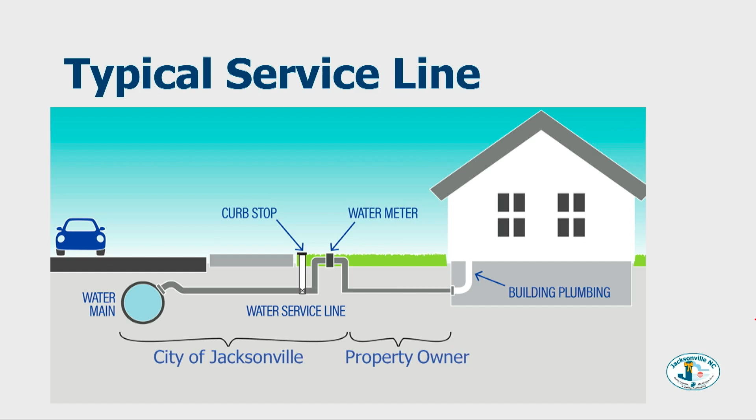Now, with this legislation that's come out, it has been put on the municipalities, or at least the owners of the water system, to check both sides of the line, which is what we've been doing. So moving forward with that.

The lead and copper rule, just going through, those were implemented in '91. We all know that we stopped using lead pipes in '87, 1987. We wanted to reduce the amount of lead exposure throughout water. What causes the lead? It's not so much the lead pipe, it's the degrading of that lead pipe with chemicals and corrosion, and that breaks down the lead, which then introduces it into the water.

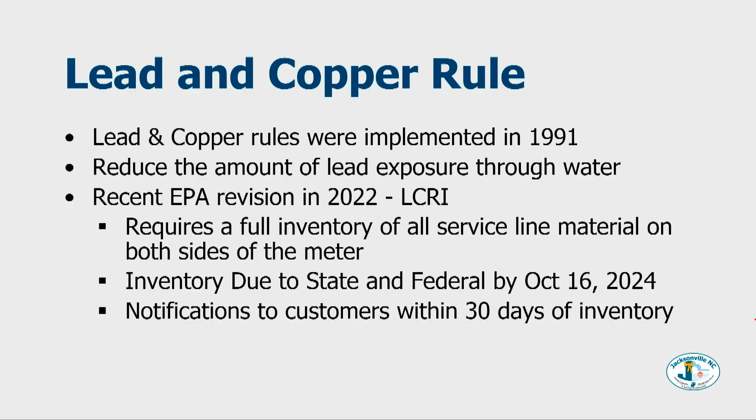A new EPA revision came out in 2022, the lead and copper rule, and they wanted an inventory, the LCRI. So we had to get a full inventory of all service line material on both sides of the meter. The inventory was due to the state by October 16th, 2024. And then we had to put out notifications to residents and customers on the status of their water lines. What did we do?

We implemented a database in 2023, which is accessible through the city website. We have our side that we're looking at, and then we have a resident-facing dashboard for them to track, and they can inquire about their own address and what's going on. We mailed out notices to customers detailing our course of action. We tried to educate them on the lead, copper, and galvanized pipe and what all those things actually mean.

We've done over 12,000 lines that have been identified through either physical inspection or otherwise were known because they were built after a certain time, and we have record of the deed, what lines and materials were used. Or we put it in and we know exactly what's there. We've complied with the inventory and identified the unknown materials that was due. We hit that mark, and once we got there, we were in a pretty good spot because we had no lead service lines discovered at that point.

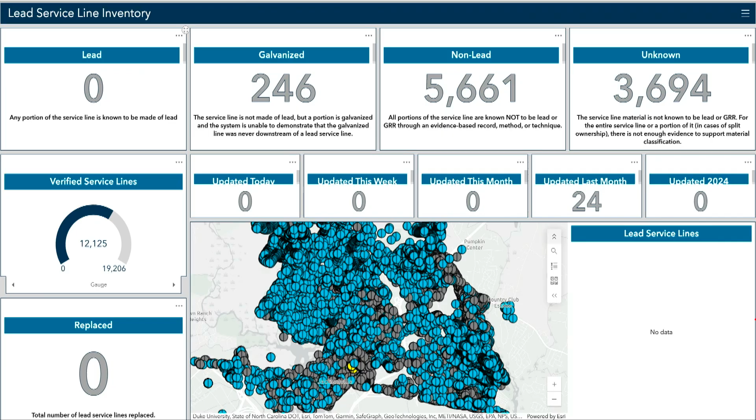But this is where the work went in after we did that. This is just an idea looking at that. This is what the dashboard looks like, and you can see over 12,000 lines verified. You'll see the galvanized, the non-lead, and then the unknowns. And we'll get into what we have to do with the unknowns.

So the unknown material, this is the ticking clock that Wally's talking about. We have to have this identified and reported to the feds and the state by 2027, October 2027.

It takes a lot of heavy lifting to send all the TJ's guys out to go dig up every line and physically inspect it. They've done a lot of that, and they've tried to do those concurrently with projects or other repairs. If they're in there, we're checking the line. If we could rule it out, we're checking the line. We're doing everything we could do to get through these things, and that's how we made the progress that we've made so far.

We have 6,200 lines that remain that require material identification. Challenges with those include adverse locations and depth - we can only dig down so far with our equipment. And also the length, the segment distance from the main - if your scope doesn't go that far, you can't rule it out. So we have to get down to that point.

We have some unknown segments that we can't access because it's so far from the main or our access point, we can't see it. And with some of those, why don't we just dig it up? Well, because they're under hardscape - many layers of concrete - or they could be on commercial property that's privately owned. So then we have to make contact, dig that up, break through everything. It's challenging, and it's a heavy lift.

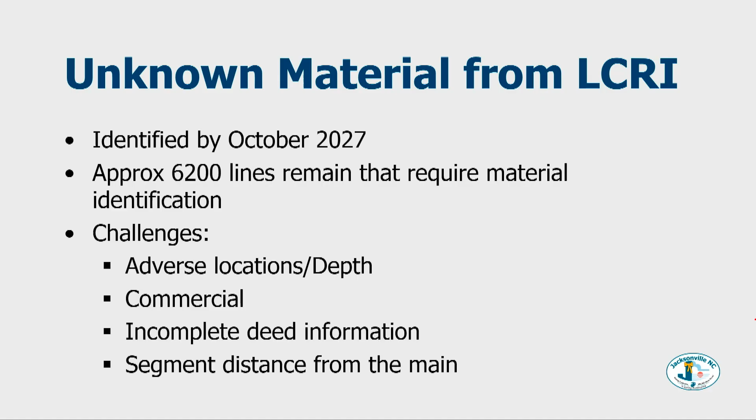With this unknown material, everything that we found that was unknown had to be classified as galvanized requiring replacement, so the unknown material notification went out. If we had somebody that, after October 2024, we had not identified what their line was, notifications went out to those residents so they know what the next steps were and what we're going to do.

The galvanized steel lines that we found, no lead has been found in any of those galvanized lines. Inspections that didn't go all the way to the main triggered the galvanized requiring replacement notice, and all those notices were delivered out, again, with the unknown material notices and all that.

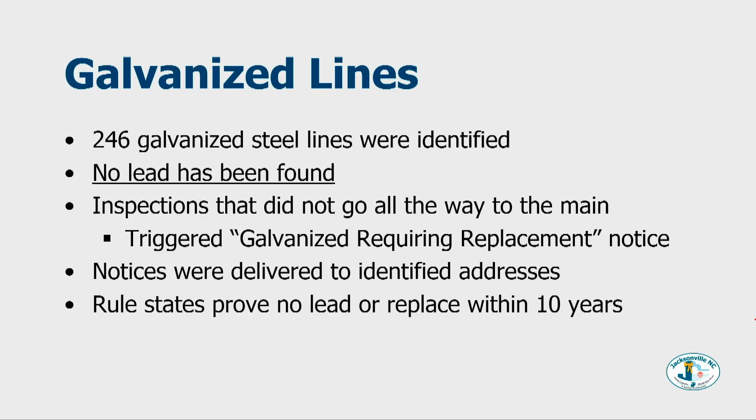Rules say that we have to either prove that there's no lead on the 246 galvanized steel lines that we've seen, or the ones that we can't go all the way to the main on. We either have to prove there's no lead there at some point by 2027, or we have to replace it within 10 years. And that's the galvanized lines.

Replacement of those lines is really one of the big concerns, because the feds have been putting this out in phases. They haven't just given us a clear blueprint from the jump. It's kind of been, alright, you got to do this now. Okay, you got to do this now.

And funding for this is a big concern for everybody. The city of Jacksonville, we're kind of like too big to get help, and too small to get bailed out. So we have to look at grants and things that are in there that we could possibly qualify for in our smaller systems, and hopefully use those to offset costs that we have to deal with replacing pipe that has to be replaced.

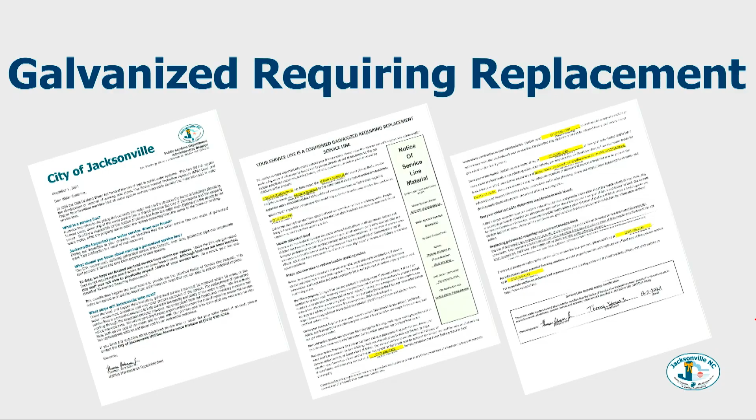And there still has been no guidance on whether or not we're going to have to support the residents in replacing any of their pipe on their side, because obviously we can't just dump that on 76,000 homeowners that may have a problem and be like, hey, you may have to replace your pipe.

And here's the other thing: we may not have found any lead in their service line, but we don't know what's inside the house. So if you have a home in Northwoods or downtown, and you had some sort of repair work done to your service line in the past, that would have updated that material. But whatever the house was built with probably still remains inside the walls.

Is there a year that normally it does it, like 1980s, 1970s? 1987 was the year that we stopped using lead. It was ruled out—you can't use lead in any water systems. It became law in '86, so I think a lot of the industry had kind of tapered off some, but there's still a lot of lead that was limited in size, so you really don't have to worry about anything larger than 2 inch. So you're really talking about things smaller than 2 inch, which is why they say service lines. And there's a lot of service lines where they used...

Galvanized, and galvanized can have lead fittings—lead soldered fittings. Or they may have used some sort of plastic or something in the yard, but inside the house itself, especially some of those built in the 50s and 60s, they may have had lead or copper plumbing. And that becomes an issue for the homeowner, because the challenge with copper, which you can still use today, is if you have lead that's leached into the water, the copper will absorb it and hold it and release it.

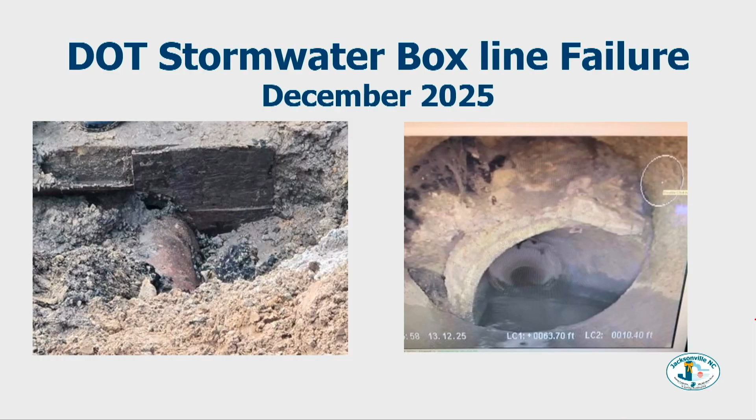So TJ's guys got in there. They worked 72 hours straight over the weekend. I think they found it on a Friday. It was freezing and raining, and they were out there 72 hours straight to isolate that leak and clean up the sewage that infiltrated the stormwater line, clean that outfall, and we had to report to the state, we had to report the spill, all the stuff.

The biggest problem is that the lines we're talking about that come off, and I'll go through this and jump around, but those lines are 50 years old. It's hard to think that 1972 was 50 something years ago, but it was. Those lines are old, and when the state came in, DOT came in and built the bypass, they didn't move our lines. They just put their stuff on top of our stuff and 30 feet down. So we couldn't get to it.

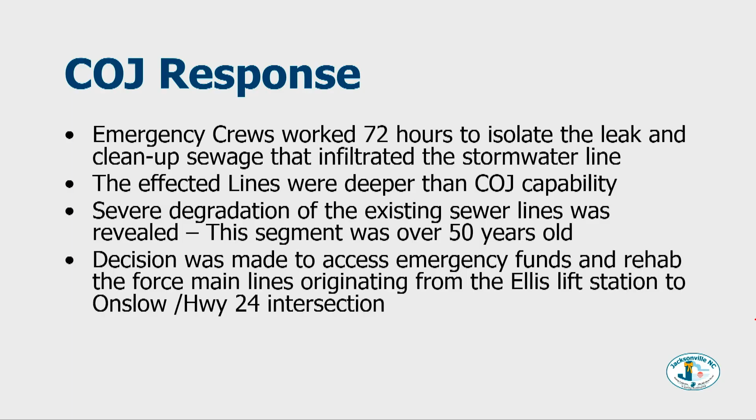So that was a big issue. We had to call in emergency contractors to get in there, just to close it off and find exactly what was going on. Now our guys, TJ's team was on it. They were watching the meters, seeing the pressure problems. They knew there was an issue, and they were quick to get on it. Straight through the weekend, freezing rain, shutting it down, they got that leak turned off so we could avoid an NOV and fines and everything else.

Again, those lines were deeper than our capability. We really stop at like 5 feet, we don't dig past 5 feet for multiple reasons. Once we get over that, we have to step down and bank to get down to it, but that hole would have gotten massive, and you'll see why in a little bit. As we got into that, we saw a severe degradation of the existing sewer lines as we got in, and we were checking this, and you got to clean these lines, and camera the line and everything else.

We knew those lines had to be replaced. They were already in the CIP to get done because we had already done the portion in front of Beirut Memorial where we lined that, and we knew we had to keep going. But this is force main, so that's always a bigger issue. We got in there, saw it was bad, and the decision was made to access emergency funds and rehab the force main lines originating from the Ellis Lift Station all the way to the Onslow Highway 24 intersection.

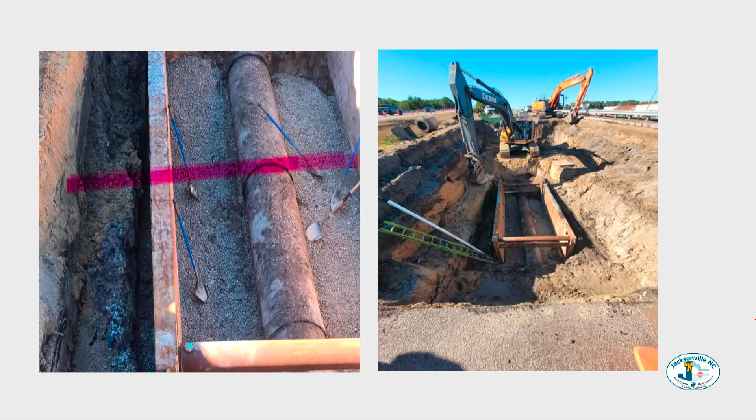That's a picture of the hole to get down to that sewer line. You can look at the size of those excavators and just see how far down that went. Some of you all saw it driving by throughout Christmas. That's a long way down.

Remember, that wasn't always there. We used to have Lejeune Boulevard, but that just kind of built up and built up as they put the bypass in, and these lines were in there. So we had to get to them and get them changed out. So we got this fixed. The contractors came in, working side by side with TJ's crew, and they got this thing closed up.

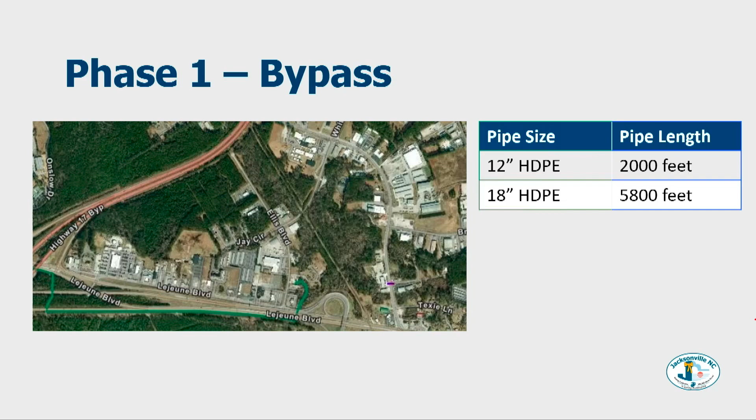The next thing we had to do to rehab these lines, after we figured out we're going to access emergency funds to get this done, you can see the bypass line there. 7,800 feet of bypass line had to be laid down before we could even begin. So we had to bypass the force main from Ellis Pump Station all the way down to tie back in to go through the next basin down to the main pump station. That took a lot of work, as you can imagine.

There's an idea of what that line looks like. 12-inch and 18-inch line going across has to be fused together, and it's a special kind of process, I want to call it welding because I'm a welder, but it's a fusion that they do. They fuse these lines together and have to bracket them together and then pressure test them.

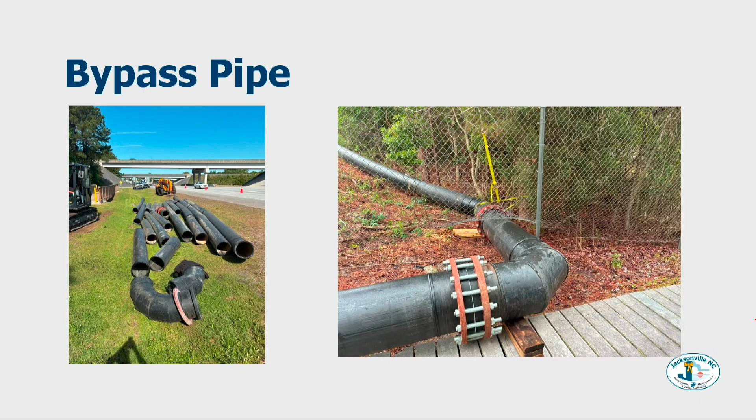We have to flush these lines. Once they get it all up and routed through and out of the way, they're going through stormwater lines and under the highway, anything they can do to not disrupt traffic, because these were going to be in place for quite some time.

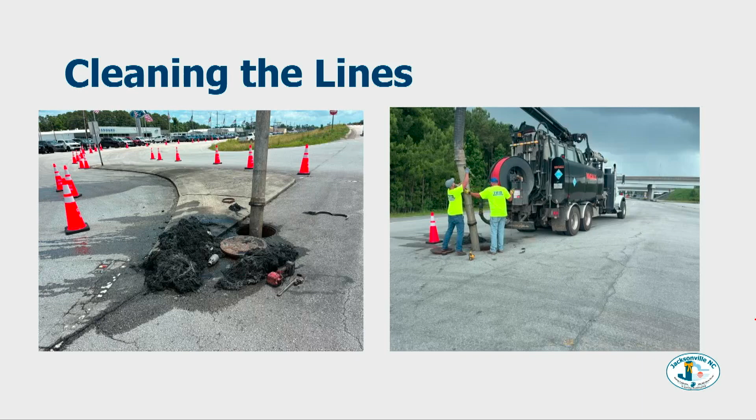So they pushed through. After we did that and got the lines bypassed and shut down the force main coming out of Ellis Pump Station, the boys had to go through and clean the lines. There they are with the sucker truck and the jet truck making things happen. You can see just some of the stuff coming out of there, all that debris built up over years and years that gets hung up.

As we went through, we found 40 tons of debris that was removed just from the lines. That included rags, one entire manhole cover, pieces of the reinforced concrete pipe, RCP, that had been degraded and broken down. Sometimes we brought it to you before where we had cameraed some lines and it kind of looks like a sunken ship. You can just see the skeleton of the reinforcement.

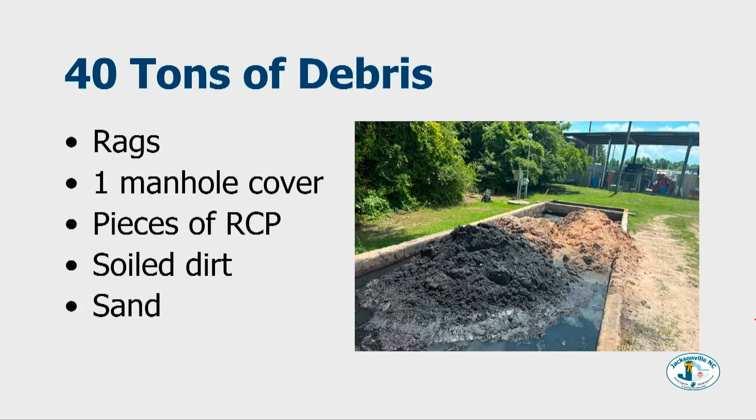So all that concrete had fallen down, large chunks of it that they pulled out as they flushed these lines and just sucked it all out. A ton of soil and dirt, as you can see, that black dirt, that's oil, that's sewage, that's all those things that are in there. It just clumped up and built up in spots. And then, of course, sand, all from the dirt and the sand comes from that I&I that we talk about so much.

So 40 tons, and our crews pretty much did most of that with the help of some contracting trucks and whatever else. They pulled all that out and we had to dump it, sort it, and get rid of it. It's contaminated soil at that point, so we had to make arrangements to get rid of that. And then off it went.

So we fixed the hole. Now we bypassed it. We've cleaned the lines. And what are we doing next? We went in and did the manhole lining. We talked to you guys previously about the manhole lining that we did, and we were doing this project around it. TJ loves it.

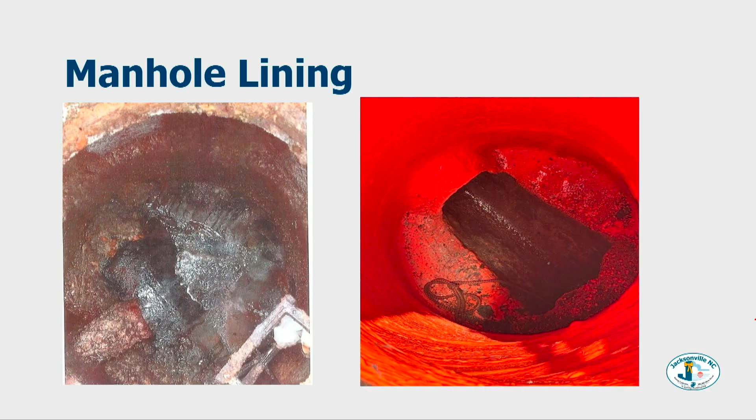So if TJ loves it in his manhole, he's going to keep using it. We had the opportunity with all these manholes that were in there, I think there were 24 manholes somewhere in that area. Some were brick, some were concrete, and whatever else, but we knew those boxes were going to be compromised, so we had them all done and lined in accordance with the project. We get something crazy like a 50-year lifespan on those with that 500 mil deep liner that they put in there.

It's great stuff. We popped a few of them open that we did a couple years ago, and they still look beautiful because things just don't build up on it, and it breaks down.

So how deep are those? It depends, sir, it varies. Some go as deep as 15 feet. Okay, do we have any deeper than 15? Yeah, there were a couple that were 27. It gets shallower as it comes toward the memorial. Right, okay. The deepest ones are right there where the force main ties in.

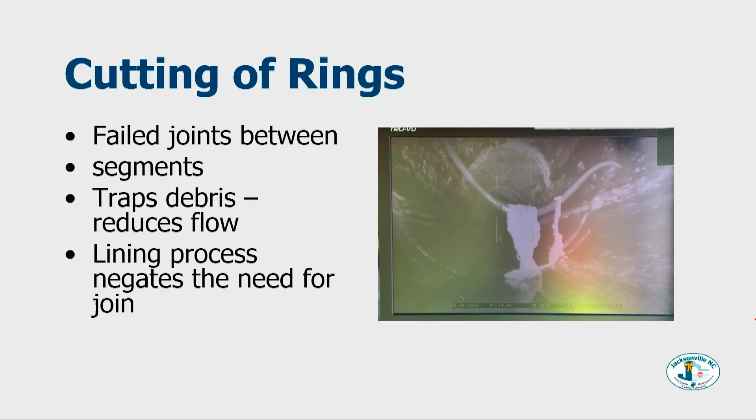Next step going in there is the cutting of the rings, right? So those rings, those joints hanging down there, we call those rings, but that's the failed joints between the segments. What happens is it traps debris on the flow, right? As flow picks up, the toilet paper and rags and all the things we're not supposed to flush that don't break down get caught up on these rings and they just stay there. Especially when the flow is low, they're not getting hit and moved off, so they build up, and those rings start to come down and sag.

So we've got these cool little robots that go in there and cut all the rings, these cutter heads go in and cut all the rings, and we pull all that stuff out. As we do this new lining process we've been doing, it negates the need for those joints. It basically bridges those joints. Yes, it does, it turns it into one solid sleeve. They basically put a

fiberglass-looking liner inside. I didn't want to put too many pictures in there because it's just a lot, but you can see in the photo how smooth that is. So they have these socks, right? We call them a sock, and the sock has to be customized to the job. It's like an 18-week lead time to get one of these socks done. They bring those in and feed the sock all the way through the pipe until the next union where they have to make a turn or whatever they have to do.

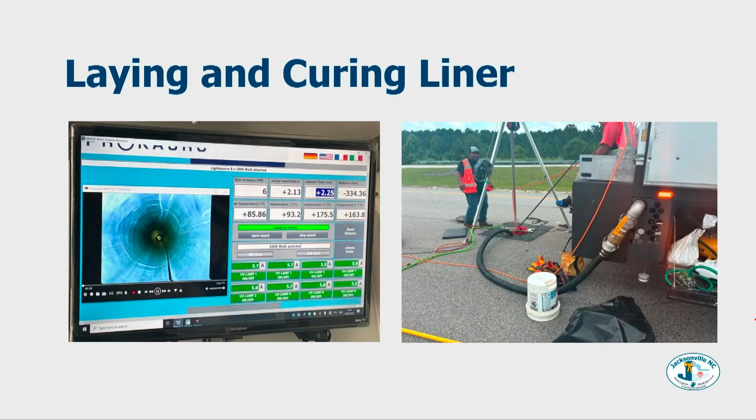And then they inflate the sock with cold water. We flush it, we pressurize it, and they blow the sock up with water. Once it sticks and does its thing, they come back through and cure it with this UV light. They go in there and are curing it with a UV light. This little robot goes in, shines the light, does the thing, moves through slowly, and it cures it in minutes. I mean, it is fast.

And then that liner now becomes super hard, like PVC. It holds and gives us, I think, 50 years of life on them? I think they say that they'll last 50. But yeah, it buys us time, all right? And again, it makes a smooth pipe, stops the I&I, stops the degradation, eliminates the need for those jointed rings anymore, and we have a nice, smooth, open pipe that we can now run nice, dirty sewage through.

Now, if it starts to deteriorate, like we said, after 50 years or whatever, can you reline it? No, most of the time what we found—so we did some lining in 2008, I think—we found a few places where it didn't adhere well, so it sagged or bubbled on the bottom, or an offset joint or failure around the pipe happened and broke it. So in most cases, those places you can't just reline. Right, that's the problem. So what do you do? You replace it, yeah, you dig it up. You dig down and do a point replacement, so you only replace the segment that you have to.

Next thing we did after they got done with all that, it was time to clean out the wet well. So that is your Ellis pump station, the deep wet well, so we all understand the science of a lift station, the pump stations, right? So this is where all that comes in from all your gravity feeds and everything else, lands in here, and then it sits there and then it's pumped up by the pumps, lifted back up through the force mains.

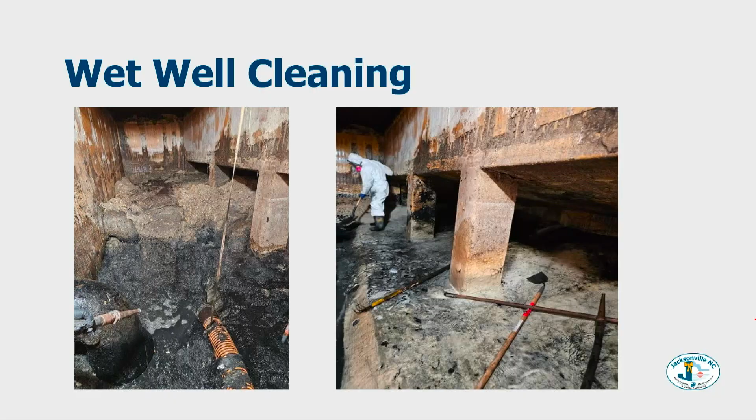And go back to a gravity feed through the basin and into the main pump station, or then it takes the 9-mile trek out to LTS. So that's what was sitting in there, and you can see the guy who got that job, very happy, excited to be in there. And I think at the end of the day, after the wet well cleaning, it was some crazy number - well above 40 tons that they pulled out, just sediment and buildup sitting in the bottom of that thing.

So they pulled that out and we got that all cleaned out, and now Ellis Pump Station's back up and running. And there's the super team right there, utilities maintenance. You think of all they do and what we have for pipes in the city - I think we have 600 miles of pipes underground running through, between water and sewer. And these guys are on top of all of it. We have 40-something lift stations, pump houses, so they are on top of it. And it's not a big crew, but those guys get a lot done, so we appreciate them.

I know it's a stupid question, I was looking at a picture a while ago when you were at the Ellis station - guy was with a shovel. You didn't have to shovel that whole mess out, did you? They vac a lot - that's why I said I would think a vacuum would have. I think he's probably moving it toward the vac, but I feel gooder about him then, because he had to do all that by shovel. 40 tons is a lot, that's a lot of shoveling.

Yeah, and you can see kind of the hand tools that are in there. The vacuum can do the heavy lift, but you got to move it out of these crevices and break it up, because it gets hard and calcifies. Yeah, they basically pressure wash it inside. And I know another step to this, after you got all that done and the lines were set, they flushed all the lines before we ran it back through. I think they ran something like 40,000 gallons of chlorinated water through there to clean it all out and push it back down.